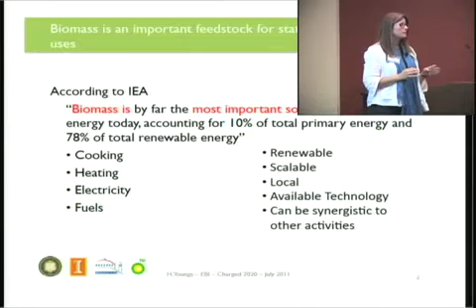Okay, we did 4 things when we did this study. The first thing we did was to implement as much efficiency as possible in the state, and this was a study out of Lawrence Berkeley Labs. The next thing we did was to electrify as much as possible, because there was consensus in the group, and this was 50 scientists from around the state looking at the issue, that electrification is generally more efficient. The next thing we did was to try and decarbonize our electricity and the remainder of our fuel.

And what we found when we did that study were 2 things that relate directly to biomass. First is the importance of biofuels. And so I'll just kind of follow up with Sue's nice talk about where we think that industry is going, but we could not meet the governor's mandate for greenhouse gas reductions unless we addressed the fuel question. That was just an absolute. We couldn't even get to 60% greenhouse gas reductions without addressing the fuel question.

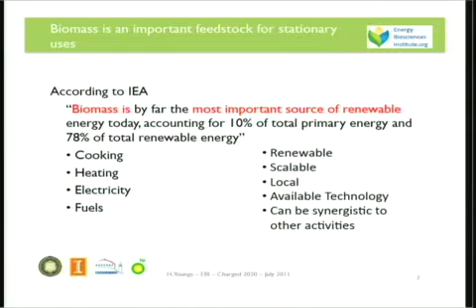The second thing was in our renewable portfolio development, we discovered that there was a critical role for biomass in stabilizing baseload electricity for intermittent renewables and in peaking, so power balancing. And this was something that's right now served only by the natural gas industry. So this is a critical role for biomass electricity and biogas.

Okay, so I wanted to talk just a little bit about feedstocks because I think there's a lot of misinformation about biomass feedstocks. The first is that we actually are in a situation in this country where we have increased biomass growing. Our forest stocks have increased almost 10% over the last 10 years. Why is that? Does anybody have a guess? Sorry.

It's because we lost our forest products industry. Okay, we stopped harvesting our biomass. And I think the result of that has been shown in massive wildfires and other types of disasters where we need to be managing our forests better. So I don't actually think that this increase in biomass is necessarily a good thing.

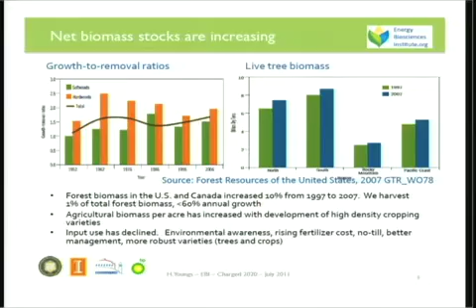We're in the middle of writing a paper right now that actually looks at the rates of forest growth, forest maintenance, and carbon fixation. And what we find is that in an actively managed forest where you are harvesting some portion of the biomass, and let me just be clear what we're harvesting here. Right now we harvest 1% of our total forest biomass, which is less than 60% of the annual growth. So there's opportunities there to actually improve our biomass harvest at an annual growth level that is sustainable, okay, and that meets our goals of having very healthy forests.

The second is this increase in agricultural biomass per acre has been completely underestimated. Farming techniques have changed. I don't know how else to say it. We've gotten better at planting more plants per acre, and we do it with a lot lower intensity for inputs. So there's environmental awareness that's cueing this. It still has a long way to go. Agriculture is the biggest emitter of greenhouse gases right now with fertilizer use, and we'd like to see this change. This is not the kind of feedstock that we're talking about for bioenergy.

So Sue mentioned we've been looking at the EBI at a number of different feedstocks that would be advanced feedstocks that would not compete with food at all, completely different acres. We're looking at energy grasses, things that are perennial, they're not tilled, they're planted once, they're harvested yearly without fertilizer, completely input-free, rain-fed. Okay, no irrigation for perennial grasses.

We're also looking in arid regions. This came up in the California study. We want to have plants that can grow with very little rainfall, like agave. These are planted now on a commercial scale for tequila production and for sisal production in Madagascar, huge plantations. And these plants naturally go through a growth cycle where they grow to a very huge, this is, again, a real-sized person. In 5 years, this is the biomass growth. And at the end of that cycle, the plant dies. So that's biomass that can be harvested as part of its natural growth cycle.

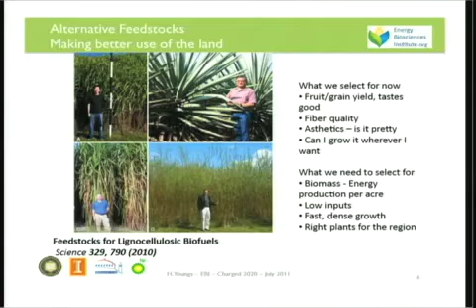What we want is energy production per acre. We want low inputs. We want something that's going to be environmentally sustainable. It's going to grow on a fast scale because we want to capture our annual carbon on a yearly scale. And we want to do this with a lot of knowledge and forethought about what are the right plants for the region. Right now, our agricultural industry is entirely the opposite. It's about where can I grow corn? Can I grow corn in the desert? Some of the highest production of corn is actually in Arizona. So does that make sense?

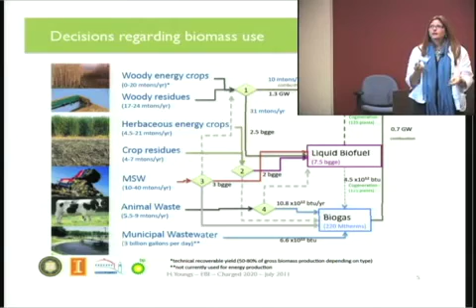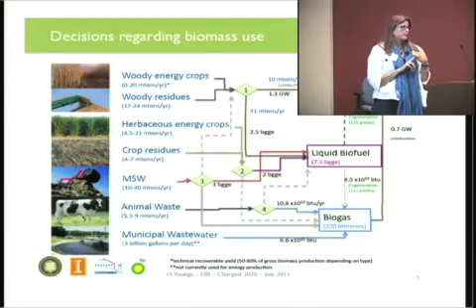I don't think so. Okay, so when we walked through this exercise for California's energy future, we looked at all of these different types of feedstocks. Woody energy crops, woody residues, herbaceous energy crops, these are the grasses, crop residues of all sorts. So this is orchard trimmings, nut hulls, you name it, any kind of straw. We looked at municipal solid waste, and I have to be clear here that we're talking about the organic portion of municipal solid waste, not the recyclable portion. We don't want to interfere with recycling programs, and we're not interested in burning plastics. We looked at animal waste and municipal wastewater as sources.

When this issue of trying to supply baseload electricity and natural gas substitutes for the renewable portfolio came up, we shifted our emphasis from looking at biofuel production, which had been the focus of that portion of the study, to looking at an integrated system that would look at biogas and electricity and the synergies between these different activities. So actually, when you put in any kind of biofuel plant, you're going to have residual biomass that's left over that you can burn. This happens in Brazil. Brazil exports a huge amount of electricity to the grid right now. So that would be a direct cogeneration of things that are left over.

In the cellulosic process, this would be lignin that is not biologically convertible to fuel with present technology. You also have wastewater streams. If you're doing fermentation, you have giant vats of stillage. These are yeast cultures, basically, that you need to dispose of. This happens in the beer and wine industry now. And so this is a huge problem.

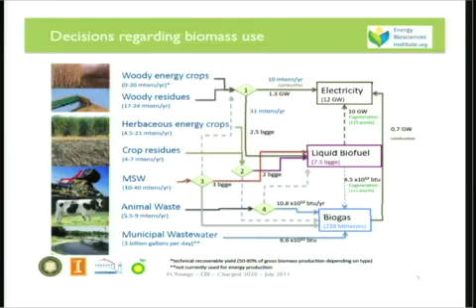Trying to get rid of this waste, and that can be turned instead into an opportunity. You can take that and treat it through anaerobic digestion to make biogas. You can use the water on the fields and reclaim nutrients from that process. So you can actually end up generating quite a bit of electricity and biofuel at the same time. And the nice thing about that is that you've then co-located these activities where you're bringing the biomass in. You don't have separate supply issues for biomass.

Okay, so turning to the heat and power issue, this is probably old hat for all of you. I won't spend a lot of time on it, but the three main technologies that I'm going to talk about are basic combustion, where you're just getting heat and using that to make steam and electricity. This would be your conventional heat and power pathway. Biological gasification, or the anaerobic digestion to make biogas. You can also make a little bit of hydrogen in that process, but it's pretty minimal.

And then, of course, the other technologies, which would be thermal gasification, which is a much more efficient way of accessing the energy in the biomass. And that you can use to directly create steam and electricity and heat, or you can use the gases that you create to do synthesis for other molecules.

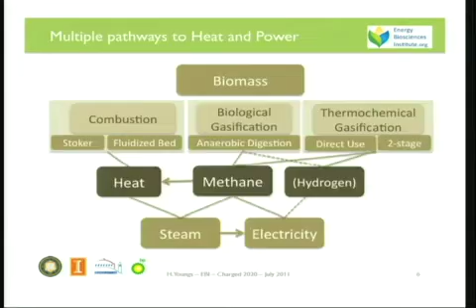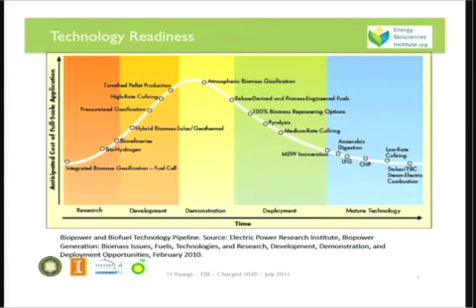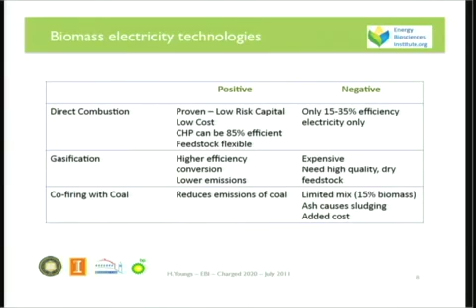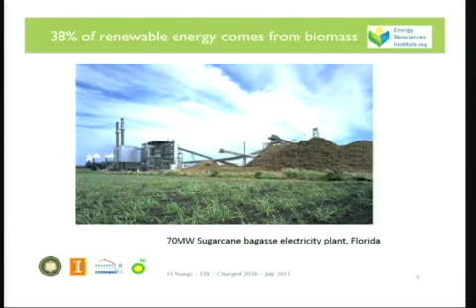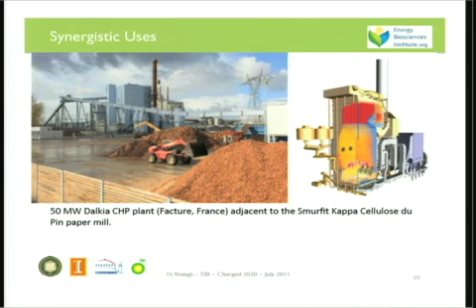This is another example, this is the biggest biomass plant in France, and it's another example of how biomass electricity can be synergistic with other uses. So here, we could use that electricity to power the sugarcane plant or a biofuels plant. Here, it's being combined with a paper company. So the paper company brings in wood, they extract the fiber, they have lots of residual biomass in terms of bark and sawdust. They feed it next door to this plant. They also feed them their high temperature steam that they can't use. And this plant converts all of that to electricity that they feed back to the paper mill along with low temperature steam for use in their process. So it's a very synergistic type of arrangement.